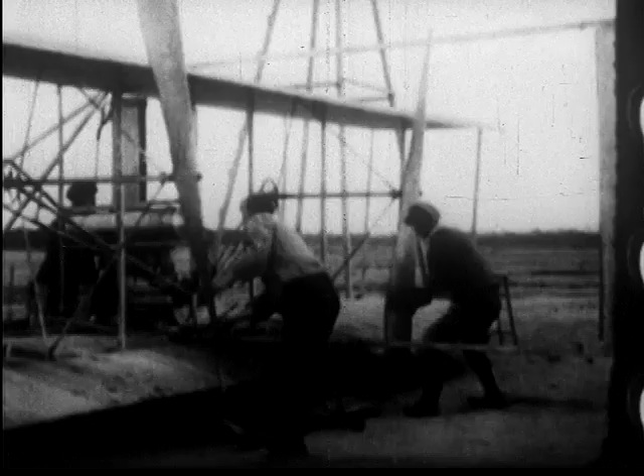There is no fuss or ceremony, no cheering crowds. The motors sputter and catch, weights drop, the ship catapults off the ground into the air for the first flight on record. Since then, aviation history is written in a never-fading book of records.

In 1928, a Lockheed Vega, the well-known Yankee Doodle, reaches New York from Los Angeles in 18 hours and 58 minutes. At the controls are Colonel Arthur Goebel and Harry Tucker.

In 1929, Captain Frank Hawks climbs aboard his Lockheed to set a new transcontinental mark. Good luck, Captain. New York is only 3,000 miles away. Off on his way to a new record, one of the many he is to establish in the years that follow.

Into the cockpit of his Lockheed Sirius climbs Colonel Charles Lindbergh. Mrs. Lindbergh is with him. Flying together, as always, they are heading from Washington, D.C., across the Bering Sea to Japan.

A perfect landing after almost half the world has rolled by beneath their wings. Cheers and waving flags as Tokyo greets them.

That same year, 1931, Ruth Nichols lands her Lockheed Vega after establishing a new feminine altitude record of 28,743 feet. Nice going, Miss Nichols.

1933, a famous Lockheed, the Winnie Mae, carrying a famous flyer, comes home from a solo flight around the world. What an achievement for Wiley Post, first man to fly around the world alone, and first to fly around the world twice, both times in a Lockheed.

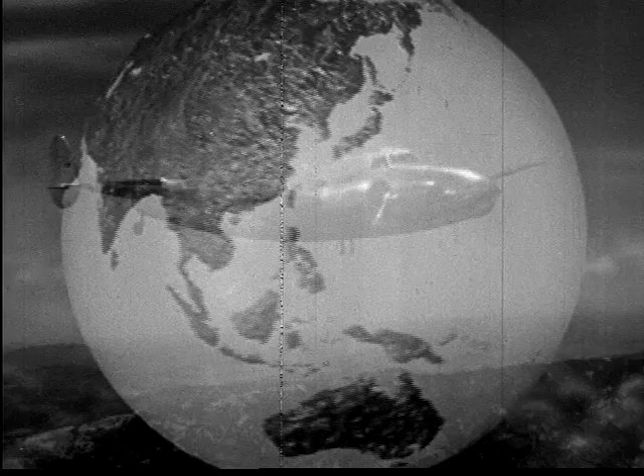And for the convenience of all customers, service and parts depots have been established throughout the world to maintain the peak performance of Lockheed's vast fleet. And in all corners of the globe, 24 hours of every day, these ships fly the airways in routine flight, confidently accomplishing the jobs for which they were built.

The conquerors of time and space.

Lockheed over North America: United Airlines, Continental Airlines Incorporated, Mid-Continent Airlines Incorporated, Northwest Airlines, Chicago and Southern Airlines, Braniff Airways Incorporated.

National Airlines, Delta Airlines, Boston Maine Airways Incorporated, Trans-Canada Airlines, Pacific Alaska Airways.

Lockheed over Central America: Líneas Aéreas Mineras, TACA, Cia Nacional Cubana de Aviación.

Lockheed over South America: Pan American Airways Incorporated, KLM, Air France, Avianca, Linea Aeropostal Venezolana.

Lockheed over Africa: Air France, Air Afrique, Air Maritime, South African Airways, DETA. Lockheed over Europe: British Airways Limited, Aer Lingus Teoranta, KLM, LOT, Aeroput, LARES of Romania, Air France. Lockheed over Asia: KLM, KNILM, Japan Air Transport Company Limited. Lockheed over the Antipodes.

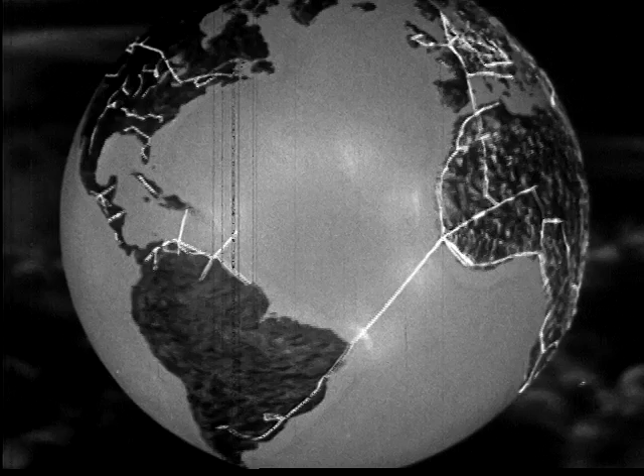Worldwide coverage, but it has not been accomplished in a day. It is the result of a smooth-running combination of men and machines. In that combination lies the story of Lockheed itself. It is a success story, modern, exciting, typically American.

The Lockheed Aircraft Corporation plant, Burbank, California, in 1926. And today, the same company, the same location, but quite definitely not the same plant. As recently as 1932, sales aggregated the overwhelming total of $23,298.03. In 1940, actual deliveries amounted to more than $42 million. And conservative estimates indicate that in 1941, this figure will be more than doubled.

To the men of Lockheed belongs a large share of the credit, to their skill and their loyalty. They are a cross-section of typical American workmen: drillers, riveters, tool makers, die casters, machinists, and technicians. In 1931, there were only 300 of them. In 1941, over 35,000. Every man who checks in, from office boy on up, has taken and passed exhaustive tests covering intelligence, temperament, and special aptitude to prove his individual ability. 35,000 American workmen, the right men for the right jobs, to build the best planes.

This is not a trick shot made with mirrors. It is the drafting room of the engineering department where every new Lockheed has its beginning, conceived with the purpose of supplying the answer to definite needs of the aviation industry. To attain this goal, over 850 engineers make over 5,000 drawing plans, devoting a total of over 200,000 work hours to their mission of creating one new design.

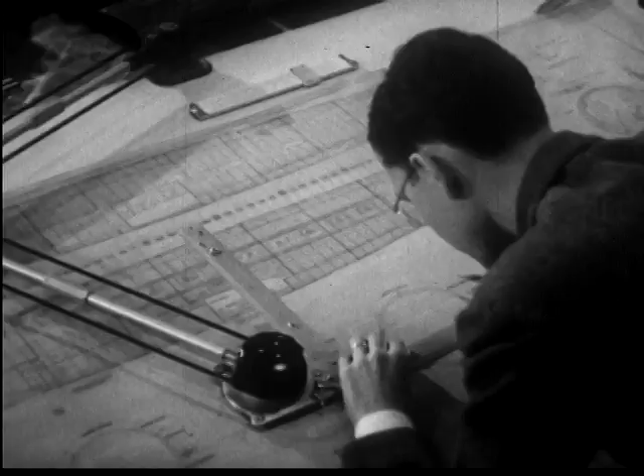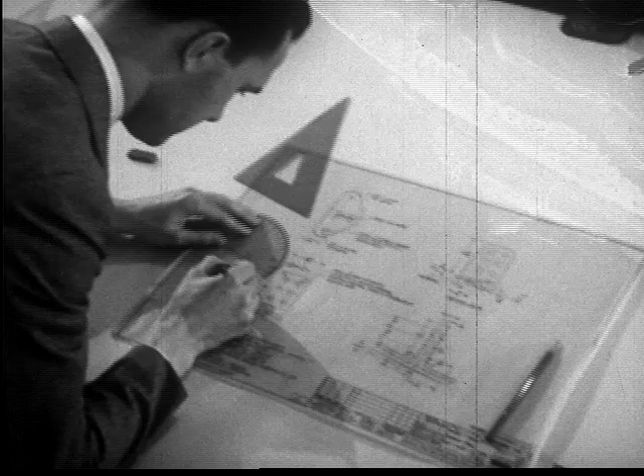The component parts of a modern airplane's wing, fuselage, and tail surface are almost countless in number, yet every single one of them must be engineered. Even the most minute part receives the greatest attention. Four separate drawings are made showing detail from four different angles. Although the part is no larger than a silver dollar, it will have to go a great deal further.

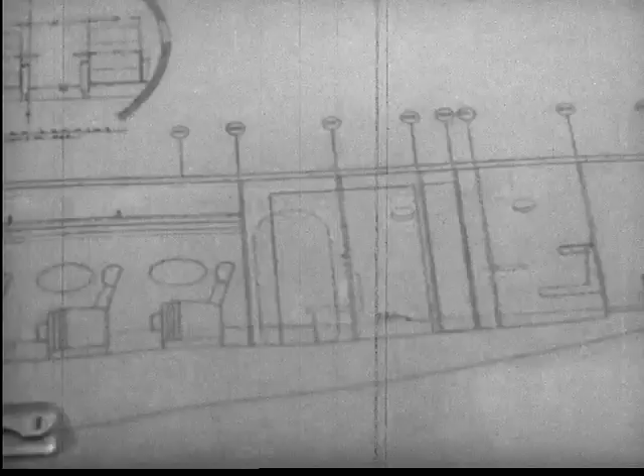The interior of a plane is one feature of design seldom associated in one's mind as coming under the supervision of the engineer. Yet one of his most important jobs is to provide utter comfort for passengers traveling through the air at high speeds. The Lodestar's cabin has been designed for this comfort. Inside, the sound of powerful motors is reduced to a pleasant hum by scientific soundproofing and vibration control. Restful chairs, ample space, and headroom are results of thoughtful planning.

All Lockheeds are especially adaptable to the requirements of private owners. For businessmen to whom time means money, the Lodestar is convertible into a convenient and dependable office in the sky. The compact 12 becomes a comfortable lounge for attending important events anywhere at any time. The cabin of Lockheed's new four-motor transport, the Excalibur, will look very much like this. Although the plane is still under construction, the engineers have built an exact replica, known as a mock-up, out of wood. In this way, every possible detail of passenger comfort can be effectively predetermined and applied.

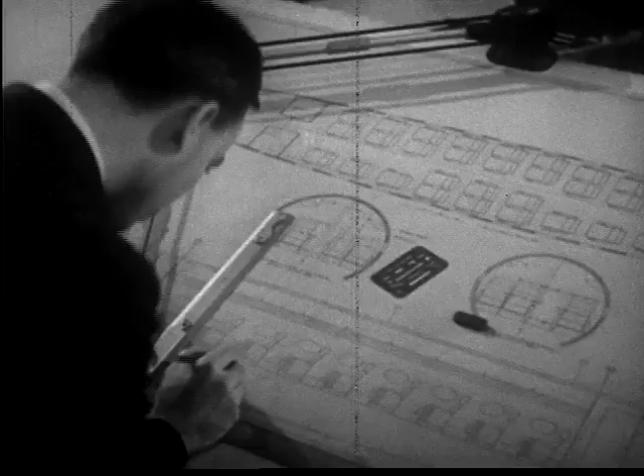But the ideas and plans that this man and the hundreds like him put into execution are not only those of Lockheed's chief engineers, but those of the entire flying world. For the Market Research Division maintains close contact with the operative branch of the industry. The staff compiles lists of important features relating to a plane's design. These findings are set up in the form of questionnaires.

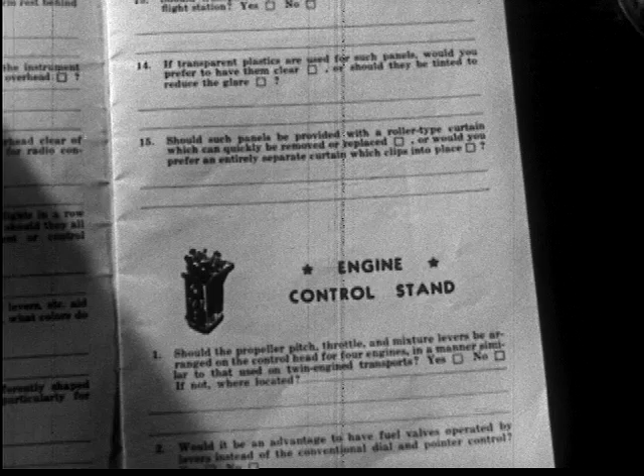If you were to build your own ship, on the flight station, where would you locate emergency controls? On the engine control stand, where would you put the levers? And the rudder pedals? These comprehensive questionnaires are sent to airline executives, pilots, transport officials in every corner of the world: to Trans-Canada Airlines, R.C. McLeod in South Africa, Tri-American Aviation in Buenos Aires, and the list is almost endless—American Airlines, Lieutenant Thatch of VP-5 Squadron Canal Zone, and British Airways.

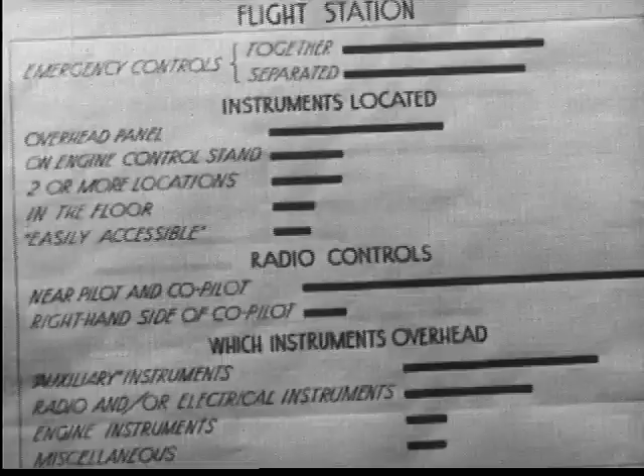The replies to these pamphlets are carefully sorted, for they represent knowledge gained under actual flight conditions. Detailed graphs and charts are compiled by competent statisticians. No suggestion is too small. Every answer to every question is checked and noted.

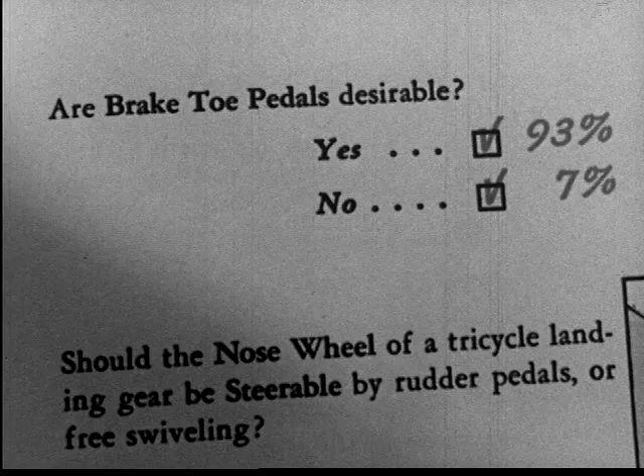These findings are recorded in another pamphlet: you told us this is the way you would do it, on flight station, on engine control stand, and on rudder pedals. We asked, are brake toe pedals desirable? 93% said yes, 7% no. That verdict is submitted by men whose combined opinions represent the experience of over 16 million hours of flying.

These practical viewpoints, as gathered by market research, are submitted to the engineers. They combine these ideas together with their own creative ability in the conception and building of every new Lockheed plane. That's how Lockheed designs airplanes to suit the men who know airplanes best: operators, pilots, and regular airline passengers. And the first form a new plane takes is on paper.

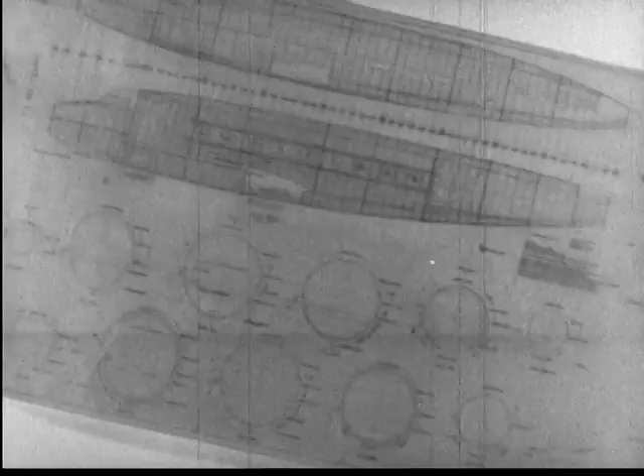From these drawings and thousands like them, an exact scale model, known as a wind tunnel model, is made and connected to instruments which determine its flight characteristics. The model is hand-carved, accurate to the fraction of an inch, weighs over 500 pounds, and costs more than $5,000 to build.

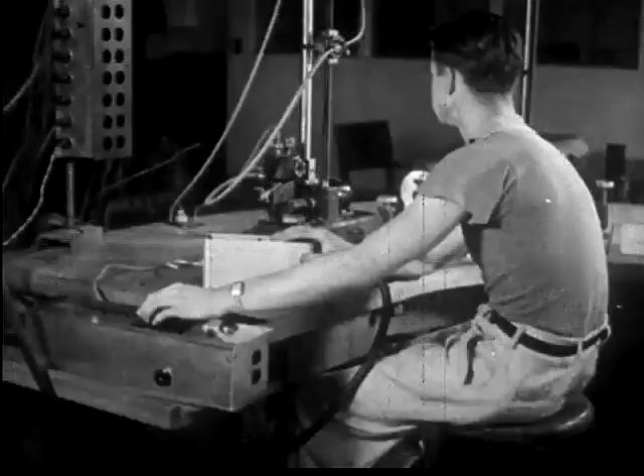The door is closed, the wind tunnel sealed. A flip of the switch and the wind propeller whips up to speed. The model is exposed to a far higher velocity than this 90-mile-an-hour wind. The small wind tunnel model is actually subjected to and withstands a much greater force.

From an idea to an actuality, from theory to fact, from a model to a completed Lockheed, the plane has been built. More than that, into it has been built the strength, ruggedness, and durability necessary for its safety and high-speed performance. But not so long ago, this shining plane was only a small part of a trainload of metal addressed to Lockheed.

For the metal inside these wooden frames is the stuff that planes are made of. Hard and strong, it must be fabricated by men and machines into the parts that make airliners.

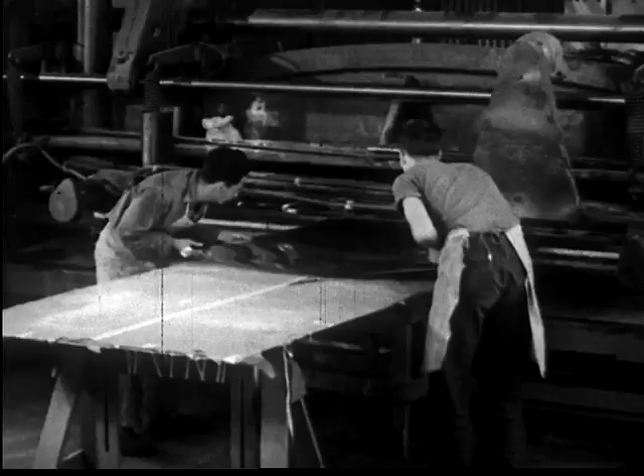Giant shears act as huge mechanical scissors. Metal sheets are slipped into place. The sharp blade strikes and cuts through them as if they were cloth.

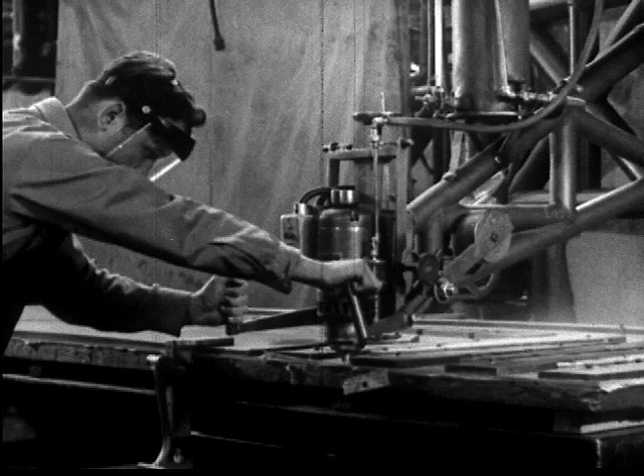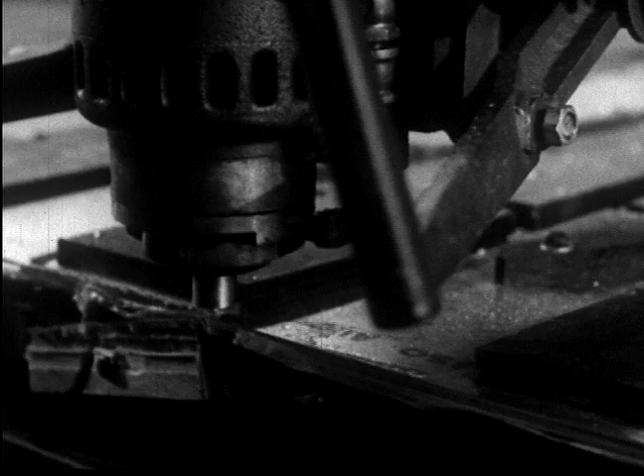The high-frequency router, a dental patient's nightmare, turns 15,000 revolutions a minute and cuts layers of metal into their first rough shape. The bit turns so fast that it must be cooled by a constant stream of oil.

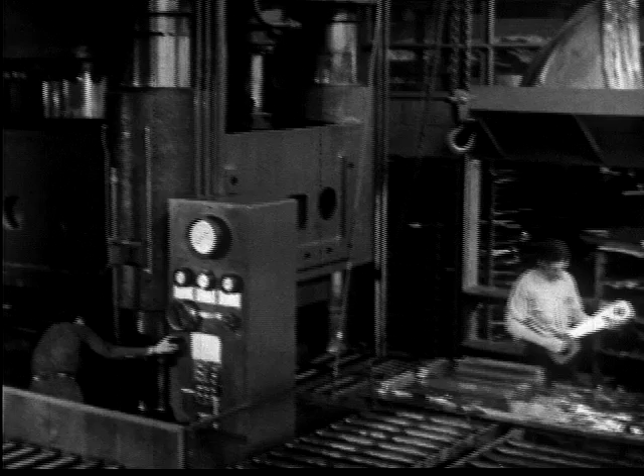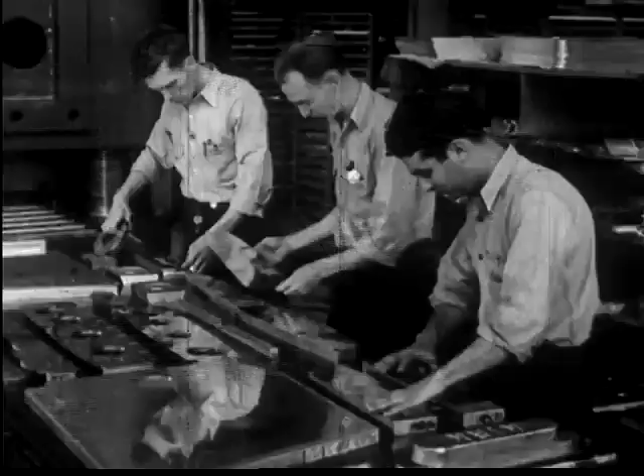The massive hydro press exerts an overall pressure of 9 million pounds, and it literally squeezes parts out of metal. An endless chain of roller conveyors carries a tray with the forms to workmen. They put the metal, which has already been cut to the correct size, in place on the forms. The tray now continues on its way into position under the press.

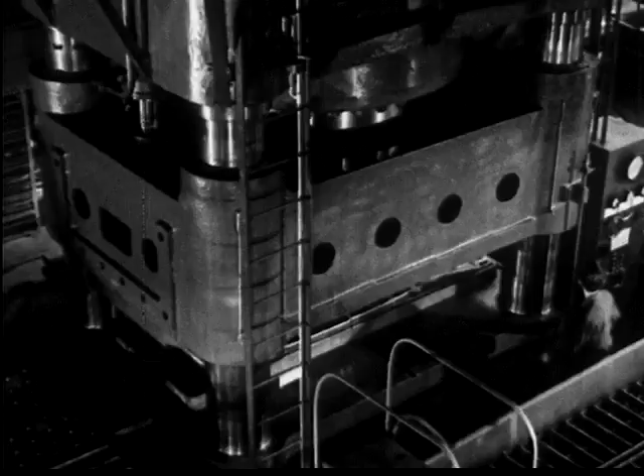The operator touches a switch, the press starts down, and look out below. Almost unbelievable pressure, an irresistible force, but under perfect control. And where plain sheet metal went in, finished parts come out. The hydro press turns out more parts in one minute than two men could complete in a whole day, and turns them out better and more accurately.

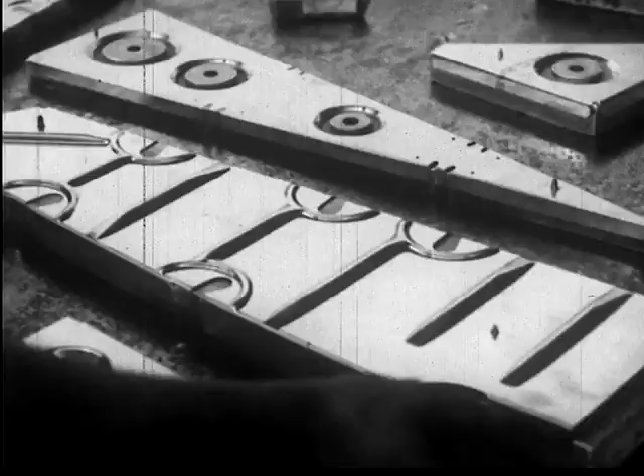A compressed air stamp which forges metal is an excellent example of powerful machinery under absolute control. Taps as gentle as a tack hammer, then the crushing impact. What a nutcracker this outfit would make. And yet its control is so delicate that it can crack an egg, at least so the operator claims.

Look out there, a little too hard and you'll have an awful mess. Be careful.

Well, hello, stranger. You certainly have a brand new kind of a mama.

Skilled men and precision machines have fabricated these parts, but even metal can be strengthened and protected. To do this, there are several types of processing. Complete electrochemical anodizing baths provide parts with a protective coating of oxide film.

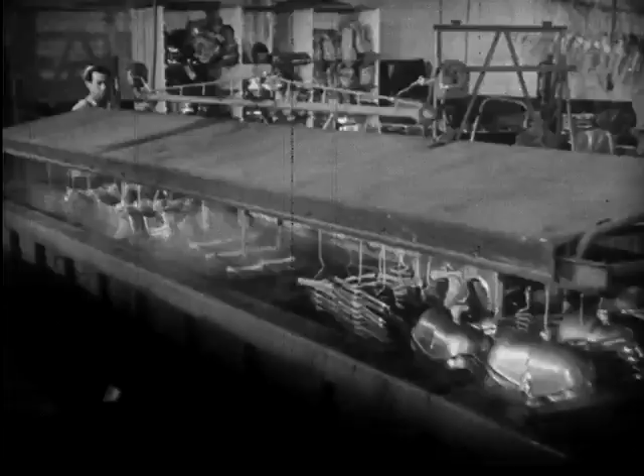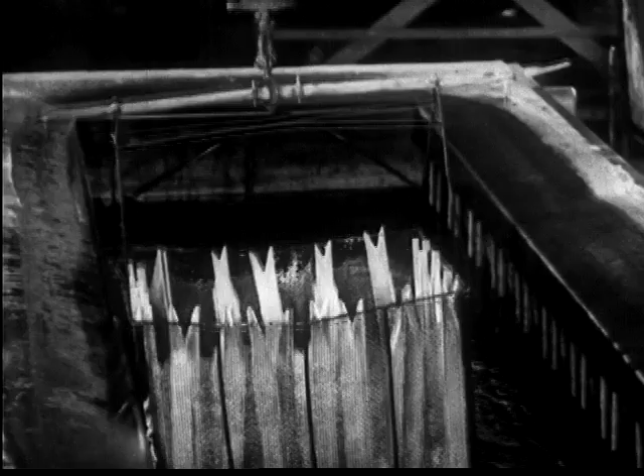This is a safeguard against the threat of corrosion caused by moisture. It is an interesting fact that these parts are protected against any harmful effects of moisture by being given a bath. Another type of bath is used for a different purpose. In order to harden and thereby strengthen certain parts, they are immersed in a hot salt solution of sodium potassium nitrate.

In large ovens, other parts are hardened by baking at 1550 degrees Fahrenheit and quenching them in oil.

It is easy enough to say that these parts, which will eventually be the plane, are strong. To prove that they are, to constantly guard the Lockheed measure of strength is the duty of the testing laboratory.

A spectrograph is one of the most modern scientific testing devices. It analyzes the purity of the metal alloys which go into a plane.

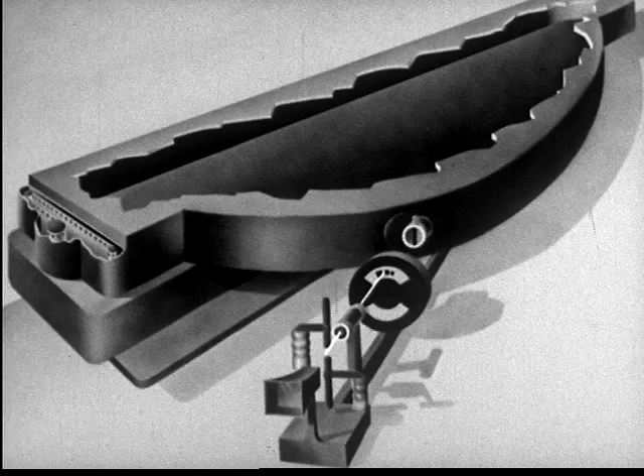Tremendous heat created by an arc burns sample filings of the metal. These filings are placed in a cavity on the lower of two acid-treated graphite electrodes and then burned. The light of the burning metal passes through a lens and then through a rotating sector, the adjustable opening of which controls the amount of light falling on the slit.

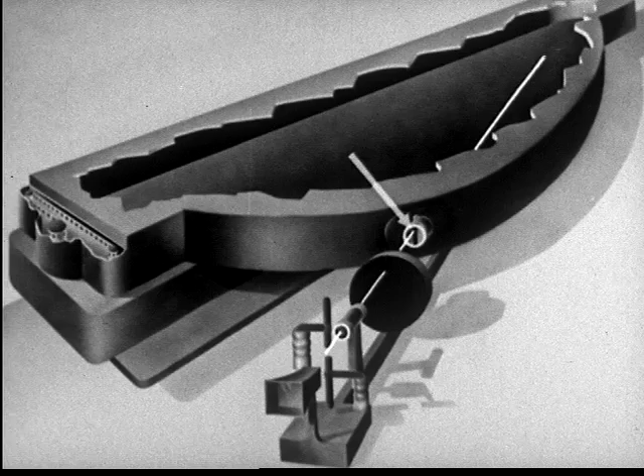The light now passes through the slit and falls upon a diffraction grating. This diffraction grating is a concave aluminized glass plate on which 24,000 lines per inch have been ruled with a diamond point. The light is separated by the grating into wavelengths. These wavelengths, or light rays, fall upon a strip of film, and a photographic record of them is thus produced.

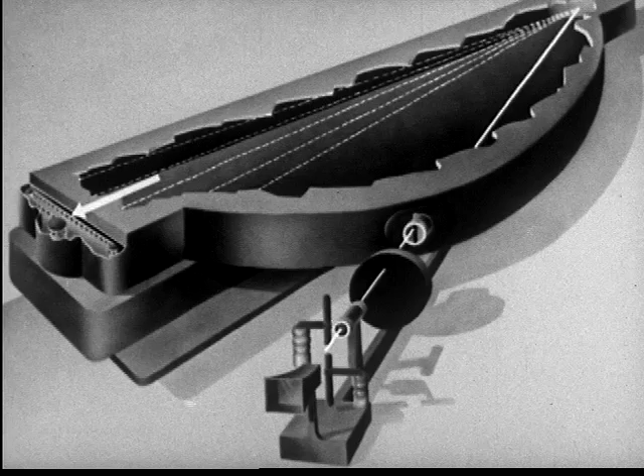Since each element has its own wavelength, from the developed film it is possible to determine exactly which are present in the alloy. In this manner, the spectrograph immediately detects all impurities, and any inferior metal is promptly discarded.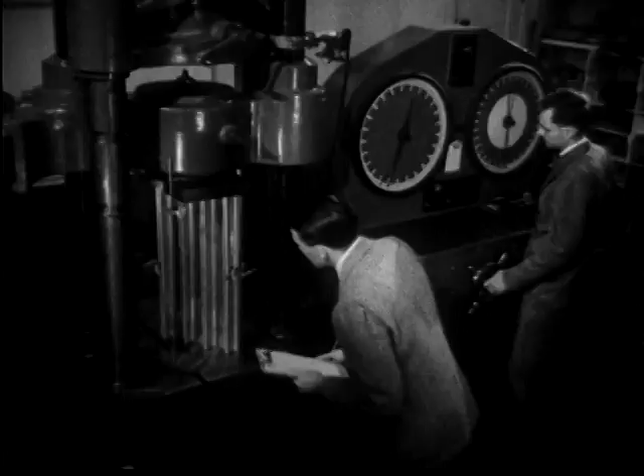The sole purpose of this huge machine is to break things. Its powerful jaws, capable of a compression of 300,000 pounds, are about to crush a small section of the wing in order to measure its resistance.

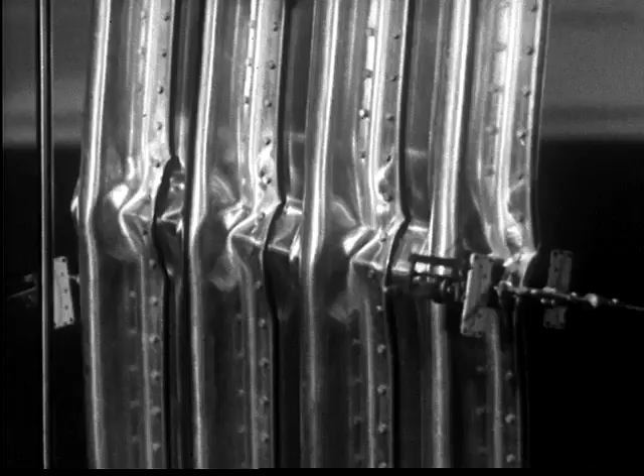Now watch carefully. The upper jaw is clamping down with an invisible, relentless force on the seemingly frail strip of metal. But actually, just how frail is it? 60,000 pounds? 70,000? There it is, a slight ripple. The breaking point has been reached, and it takes a pressure of over 80,000 pounds to even bend this frail little section of a wing.

For contrast, let's see what happens to a solid cylinder of concrete, which certainly appears much stronger. There's the first crack, and the concrete shatters completely under a pressure of less than 75,000 pounds.

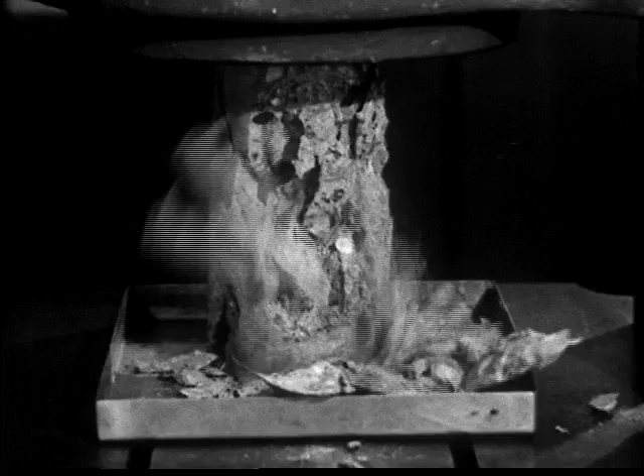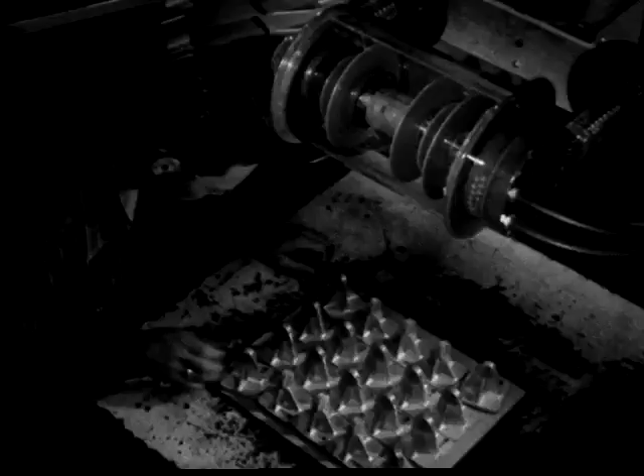All stressed parts, such as forgings and castings, are X-rayed for any possible flaws in the metal. Lockheed X-rays more parts than all other aircraft manufacturers combined. They may look new and shiny on the surface, but that doesn't matter. What are they like underneath? This batch is fine, perfect.

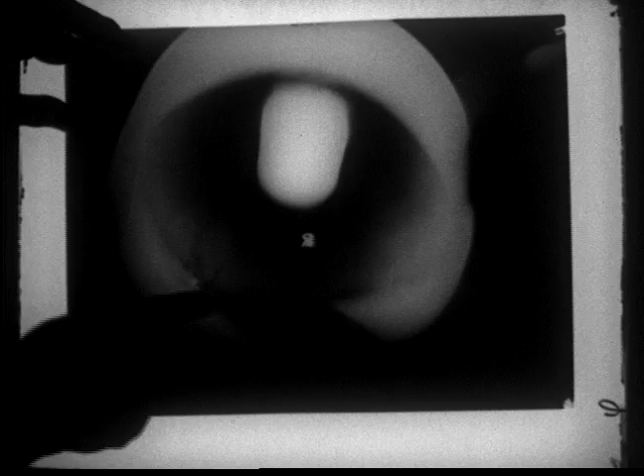A different story here. Those slight, almost imperceptible flaws which doom a part to the scrap heap would be invisible to any eye other than the X-ray. Therefore, although it is important to know what is on the outside of a plane, every stressed part is X-rayed because Lockheed thinks it is even more important to be absolutely positive of what is on the inside.

Yes, every part of this plane is built for the strength, ruggedness, and durability to achieve the highest speeds. And there goes the Lodestar. Carrying a full load of 17,500 pounds, it speeds down the runway for the takeoff. In 15 seconds, after a run of only 860 feet, it leaves the ground and soars into the air. Climbing rate: 1,200 feet per minute.

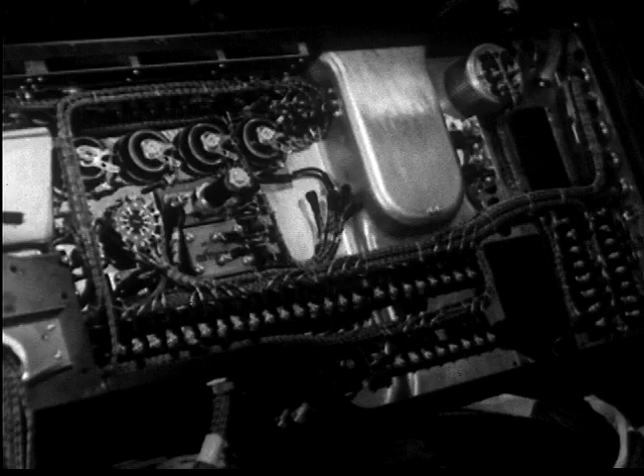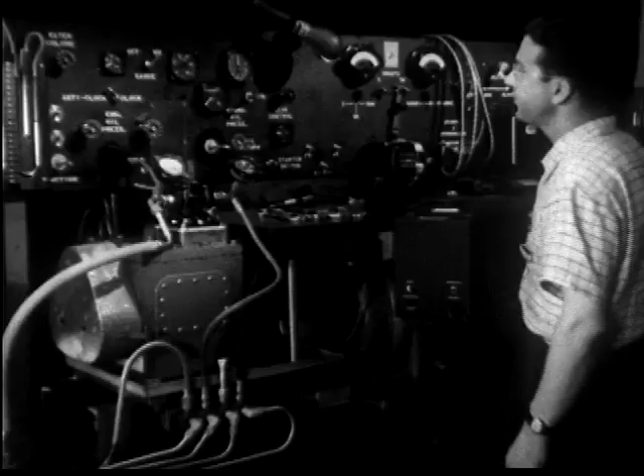While the plane is in flight, the dials and indicators on the panel are the guides by which a pilot flies. Over half a mile of wire connects them with the controlling instruments, which must be infinitely accurate before they are installed. In the instrument testing laboratory, each instrument and accessory is, to all intents and purposes, actually flown before being installed on the plane itself.

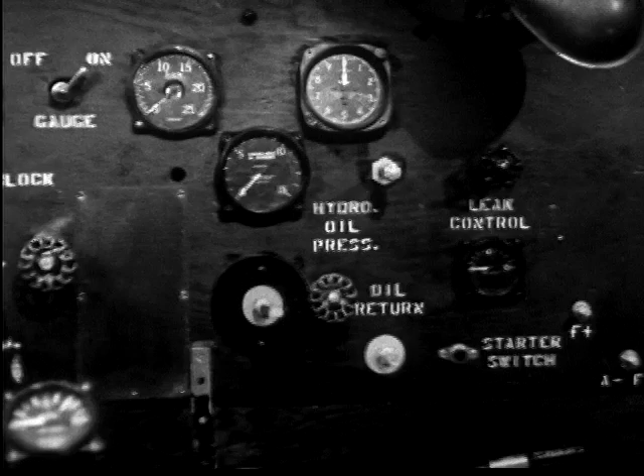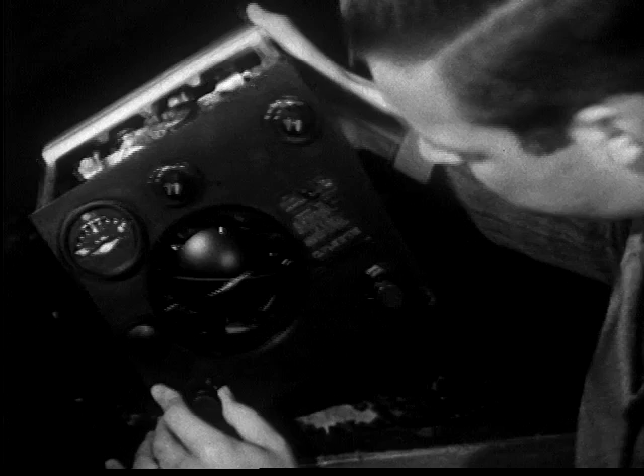For instance, on this stand, a motor duplicates the swing of a plane to test the turn and bank indicators. Here, tachometers are also tested, along with propeller governors, vacuum pumps, fuel pumps, starters, generators, and hydromatic motors for feathering propellers. The automatic pilot is checked by a vacuum system against mercury manometers.

This small box can guide a plane in flight, keeping it as true to its course as the most experienced pilot.

An airplane is a chain of which the thousands of separate parts are the links. They must be forged together in order to shape the wing, the tail, and the fuselage. The duty of the wing is to provide the lift that sustains the flight of an airplane. Here in the plant, it must be assembled as flawlessly as it was designed.

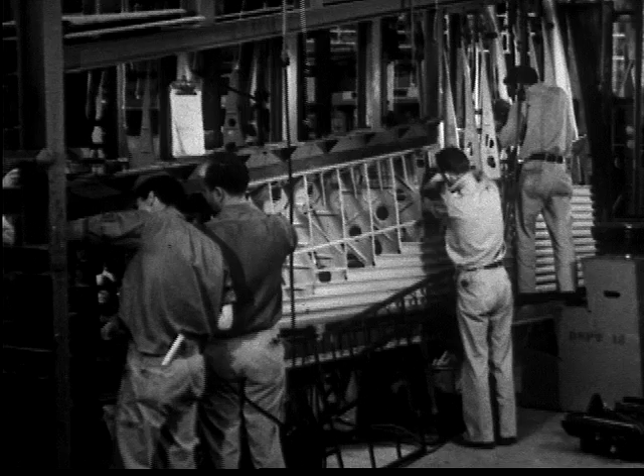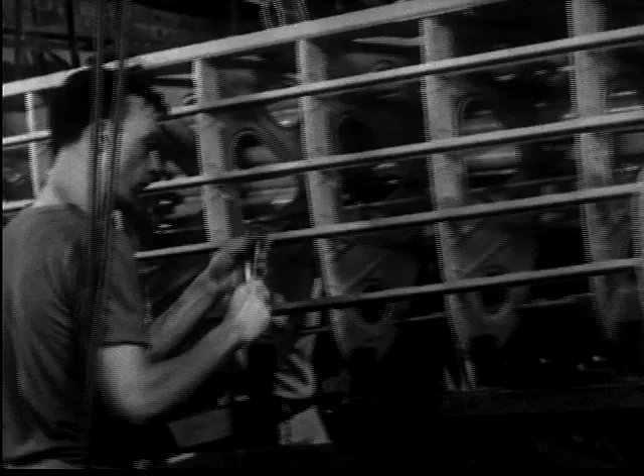Although a wing is generally considered as a unit, it is really composed of three parts: two outer sections and the center section. We are all familiar with the general shape of a wing, but while an outer section is in the first stages of assembly, we can get a good idea of the complex structure on the inside. Every rib and crosspiece has its purpose. Remember, it was just a small part of the wing that we saw withstand a compression of 80,000 pounds.

Each operation is executed with precision and care as the outer section moves down the production line and takes shape. High-speed electric drills punch holes for the rivets. There are more than 700 drillers or riveters who have all had previous training. Even so, before they're assigned to actual production, they must attend Lockheed's own school until they can uphold the plant's standard of efficiency and skill.

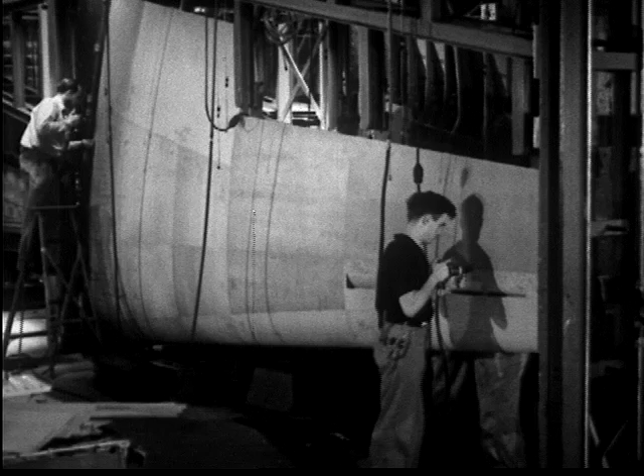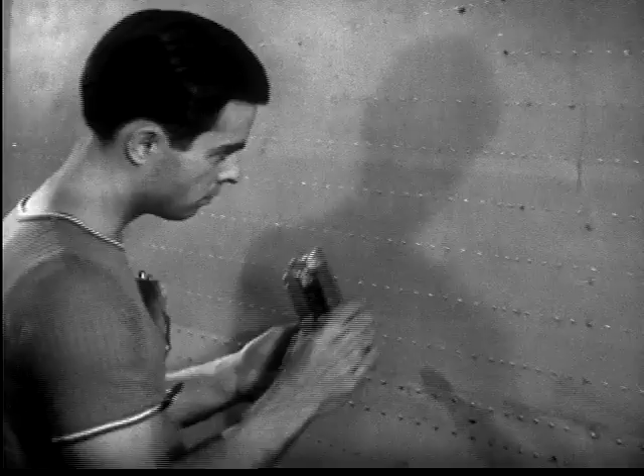There are more than 50,000 rivets on a completed wing, and every one of them is checked, examined, and checked again. This requires an army of over 200 inspectors, such as this one. But by the time a Lockheed plane is assembled, every square inch of it has been inspected at least 5 times. Inspector number 158 finds this row perfect and okays it.

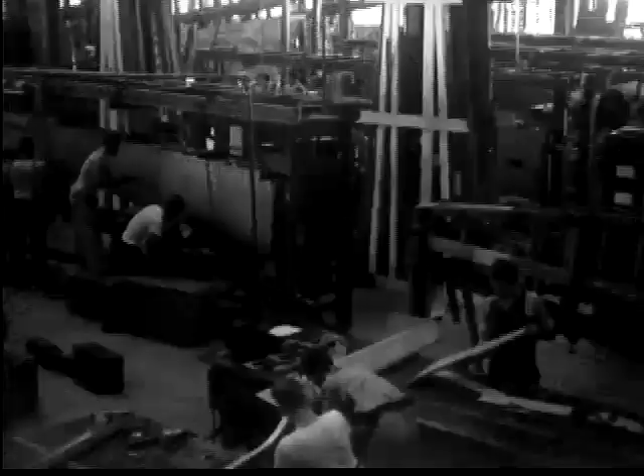And the story of one outer wing section is the story of 10, of 20, of 1,000 sections as they move down the line in an endless parade. Mass production with the emphasis on precision and quality.

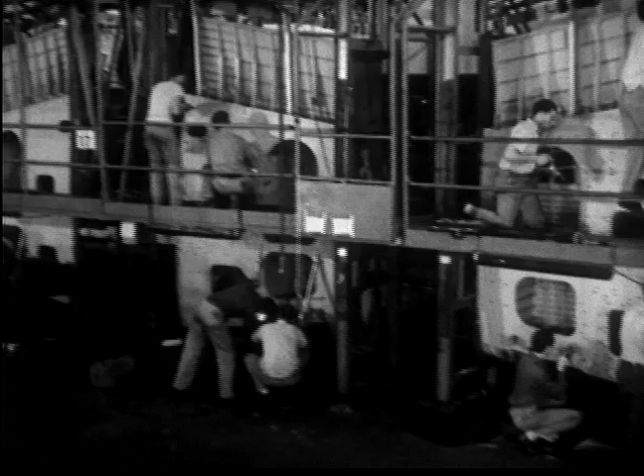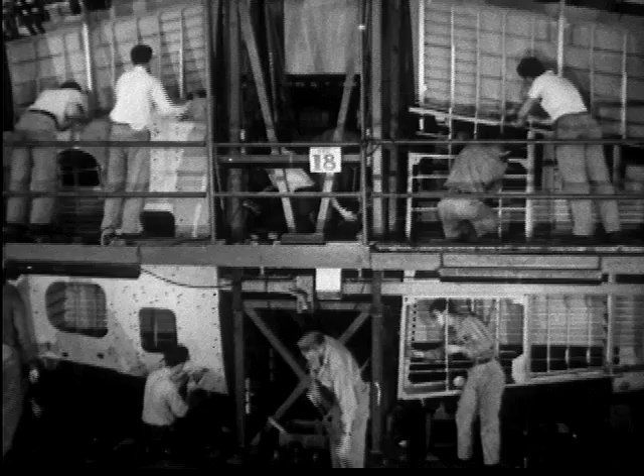The assembly line for the center section of the wing is one of the largest and most vital units in the plant. It has to be, because the center section is the strong man of the plane. It must be constructed and assembled so as to be able to support heavy loads and to withstand great strain, for it unites the two outer wings with the fuselage. The fuselage will eventually rest in the gap between the two shoulders, and the wings will be joined like arms on either side. The main beam of the center section is the strongest part, the backbone of the entire plane.

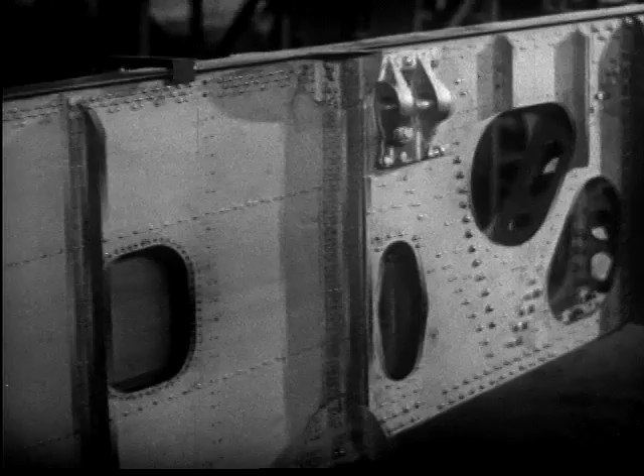Like a bridge, it must carry any burden with steadfast dependability. And the main beam is built just like a bridge. At all times, it carries all of the flying load, the engine load, and the landing load. It is stressed to support more than 5 times the total weight of the fully loaded plane. Completed and assembled, capable of supporting a static load of 70,000 pounds, the wing will do its job as the men who built it have done theirs.

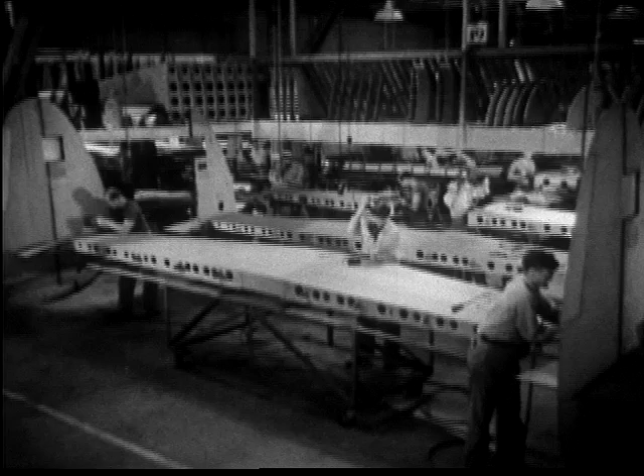The tail surfaces control the maneuverability of a plane. The use of twin rudders was developed by Lockheed and is one of the distinguishing features which point out every Lockheed. The fuselage is the body of the plane.

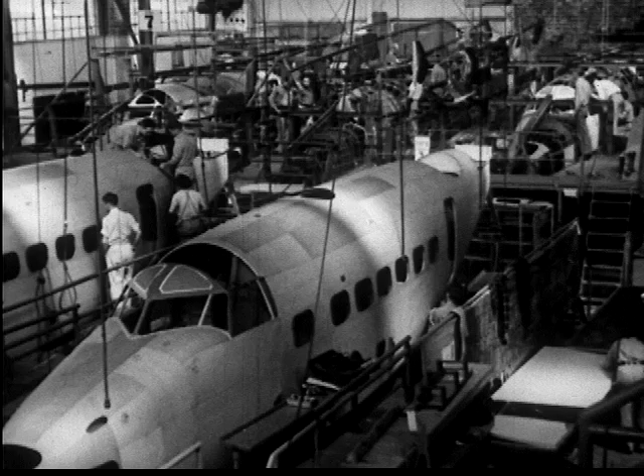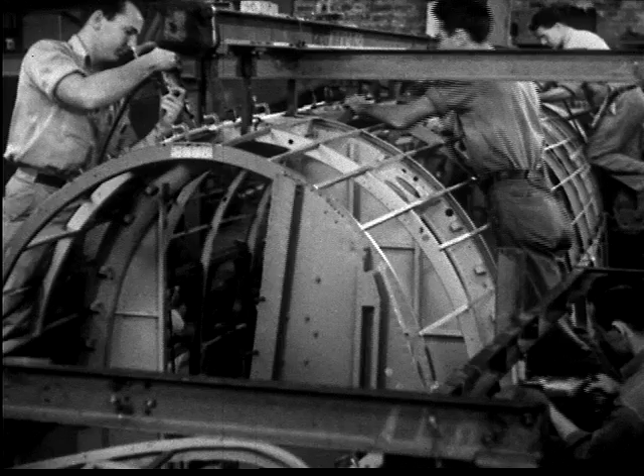It represents the final word in aerodynamic design and streamlining. During construction, these basic principles are built into the fuselage and applied to every operation from beginning to completed shell. As the first step in assembly, the bulkheads are joined together by stringers, which form the basic shape and strength of the fuselage. Skin fitters then fit and shape the metal sheets, attaching them with removable fasteners.

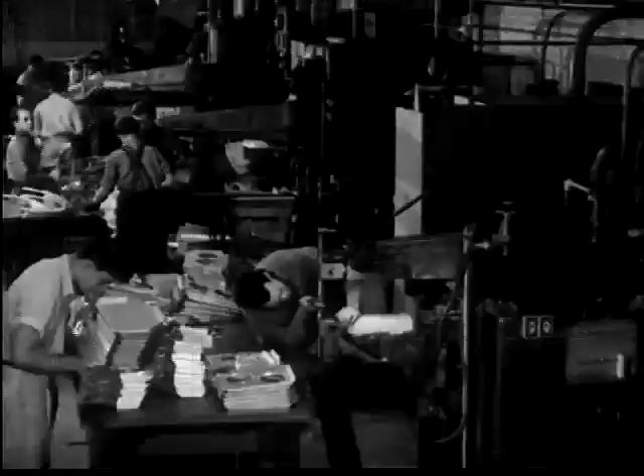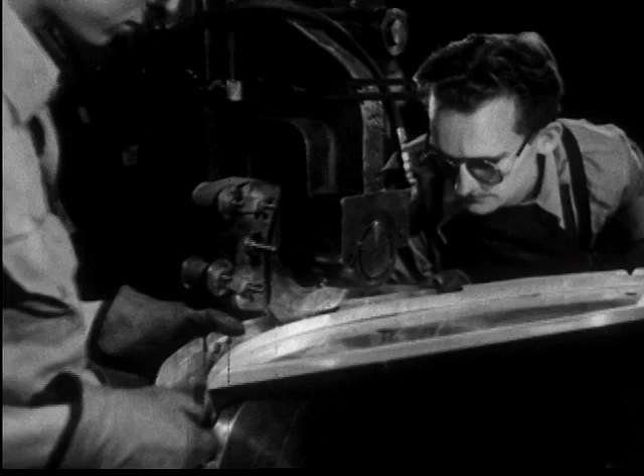On their heels come the riveters, while every stage of the assembly is constantly under the close check of inspectors. Assembling with electric continuous spot welders facilitates production and gives many fuselage parts an extra smoothness for better streamlining. With an eye to the future, Lockheed is constantly enlarging on this process because better streamlining means greater speed.

And so another fuselage is finished and ready for mating with the wing. Like a ship being launched, it moves slowly down the ways. Slowly now, yes, but for just a little while longer. Soon sunlight will be glinting from its metal sides. Its nose will point upwind.

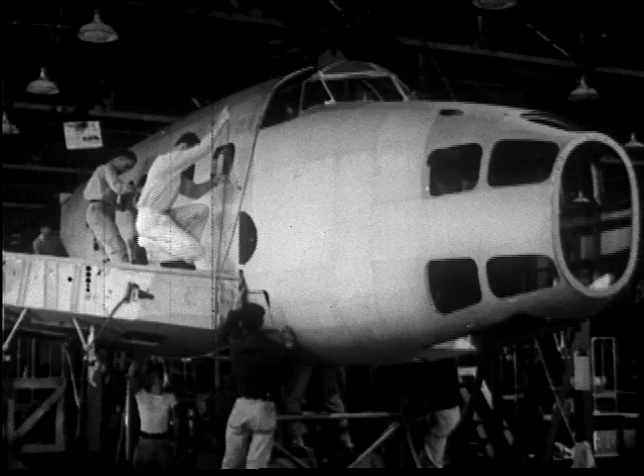In the comfort of its cabin, passengers will read or write or sleep or think after their own fashion, and beneath it, the lakes, rivers, and valleys of the countryside will unfold. Slowly still, the fuselage is lowered into place, united with the wing, and now, slow no longer.

Speed on the water. Speed on the snow. Speed on wheels. On rails. Speed on wings. There is truth in the slogan that it takes a Lockheed to beat a Lockheed.

As the plane approaches the field, it slows down for the landing. The Fowler flap has been adopted and developed by Lockheed. The flap gives greater lift to the wing and provides a brake action to reduce speed. The plane lands at 65 miles an hour, and from a height of 50 feet, it can come to a complete stop in less than 600 yards.

This Lockheed Lodestar, with its safety, its comfort, and its great speed, typifies the ideals of aviation in America. To protect these ideals, Lockheed is contributing its share toward national defense and the defense of democracy in other parts of the world. These B-14 bombers, better known as the Lockheed Hudson bombers, are rolling off the production line at an ever-increasing rate.

They have been ordered in great quantities by Great Britain and Australia. When ready for delivery by boat, the Hudson bombers are dismantled. The sleek fuselages are carefully encased in canvas, and the wings, already stowed away below deck, are crated in wooden frames for safe shipment. When the planes reach their destination, they are easily reassembled and soon ready to take their places in the staunch defense of the British Empire.

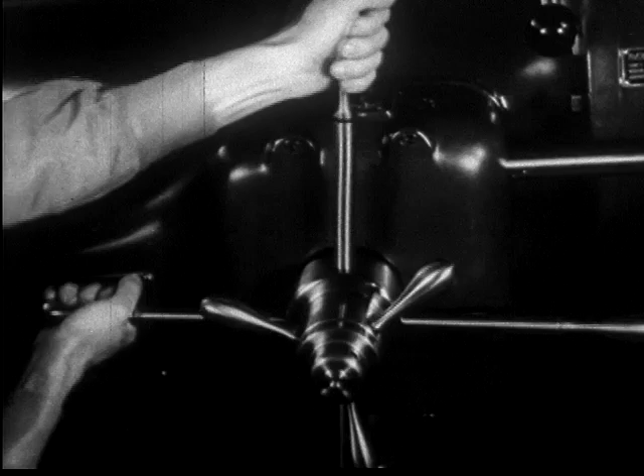It has been developed solely for national defense, and Army officials consider it the fastest military plane in the world today. The P-38. A man-made comet.

The P-38 is a completely new development in conception and design. The purpose of this deadly single-seater fighter is to prevent any would-be attacker from reaching his objective. Lockheed is building vast quantities for the United States Army, and many of its features are closely guarded military secrets. But it can be revealed that the P-38 will climb a mile in a minute, and its motors are so quiet that it can approach any target almost without warning.

And as wings soar higher above America, so are soaring the hopes of free men the world over. For they know that whether it be for commerce or defense, ship for ship, American planes have no equal. And just as Lockheed commercial transports serve the people, so do the Lockheed military planes stand ready to serve should the need arise. The striking power of Hudson bombers, the speed of the P-38.